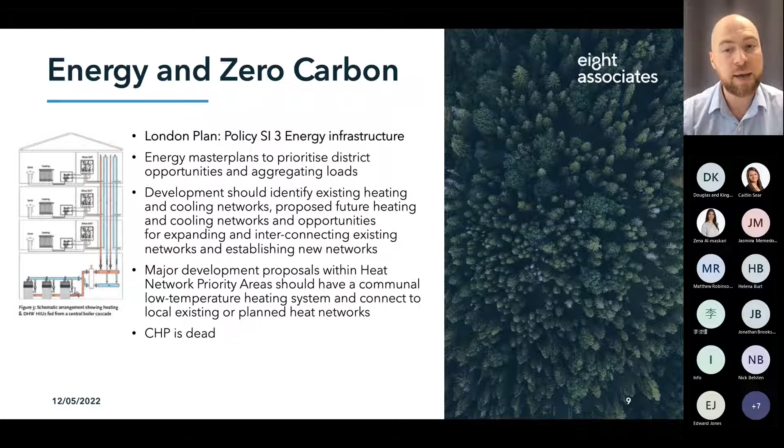So this is really our crib sheet for you. I would consider these if you're looking at making an application in Greater London, or for that matter, if you wanted a high performing energy and low carbon scheme - this would be your 9-point plan to check these points that we're hitting. This is really considered the minimal practice in London, and probably could be considered good or best practice elsewhere in the UK.

But you want to be looking through your energy assessment documents and everything related to energy and carbon to check that all of these aspects are ticked, because this will be what we're being judged against when the application goes in.

Next is overheating. So what is this? This is really, as we know, particularly in a lot of office buildings, we have a challenge with overheating in summer - too much solar gain through the windows, the inability of the ventilation system to get rid of heat, and that impacts on thermal comfort.

In the last few years, the requirements around this have got increasingly tightened up. We now have the new building regulations coming in June, which is Part O, and that's actually looking at the relationship between overheating and energy.

So this is only becoming tighter and tighter in terms of its requirements and expectations, and it's increasingly important with the impacts of climate change. In 10, 15, 20 years time, issues of overheating will only be exacerbated. So this is becoming subject to increasingly stringent rules, requirements and expectations from the planner's side.

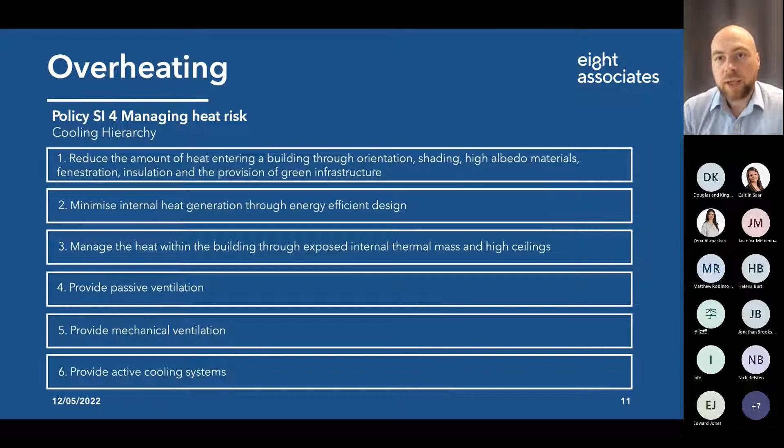The right of light technically isn't really a planning requirement, but from a risk and insurance perspective, we really need to undertake it at planning stage, because we need to understand implications for legal cases and the cost of compensation that might need to be covered later on. So this is really, really important.

And obviously, right of light, if we neglect this and don't understand the implications, it might mean we have to completely cut back and change the massing of the scheme later on, which can be hugely disruptive, massively costly to rectify, and can throw the whole scheme off balance and off plan. So this is one of those things which can be neglected but can have an enormous impact. We need to be mindful of this from a risk management perspective.

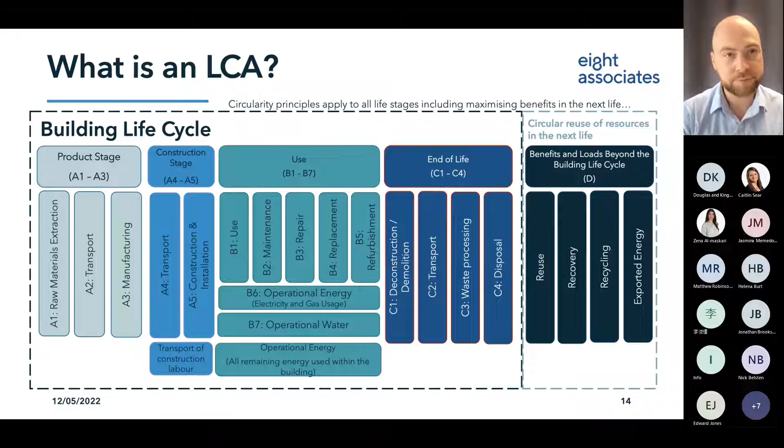So these are really the three ingredients or aspects you need to know about. We have life cycle assessment, which is the tool or method we use. The two reports we need to prepare are the whole life carbon report and the circular economy statement. These definitions are to describe what we're actually looking at, so when you're looking at these reports, this is what you should expect to see.

The key thing is we need to demonstrate how it's been calculated, and the process, the reasons why we've specified certain materials that might be considered high carbon, and if we're not reusing building materials that were on site as part of the circular economy strategy, we need to justify why.

So you might be wondering, why are we looking at embodied carbon as well? This is the second or third iteration of this policy document, and we have the London Plan guidance there. This is really the first regulatory policy instrument in relation to embodied carbon. There's also a bill, a lobby in Parliament to embed something like this in the building regulations - we'll see how that goes. But the London Plan is really leading the way on embodied carbon, and this is why.

Previously, say 7, 8, 9 years ago, we were modelling to what we called SAP 2012, and then we produced a new version called SAP 10. Basically what this all means is that as the electricity grid is decarbonising - coal's coming off, more renewables are going in - the carbon factor of electricity is getting lower and lower.

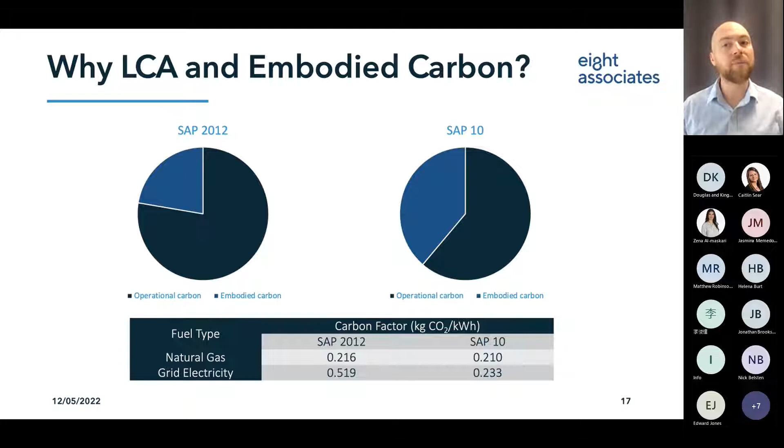You can see that when we were modelling, say, 8, 9 years ago, the embodied carbon - that's the carbon related to all the building materials in the assembly - might have been 20 to 25% of the total carbon pie. Now it's 40, 45, maybe even 50%, and that's just because the operational carbon emissions are going down due to the decarbonisation of the electrical grid. So it's putting more and more emphasis on embodied carbon.

A couple of things to be mindful of when we engage with this. If we do a pre-app and it's a major development, policy states we should complete the GLA Excel sheet, which details preliminary thoughts and ideas as to what we can do to reduce the embodied carbon of the scheme. Then when we go for the outline or detailed planning application, this is where we put in all the numbers and detailed calculations. So we don't need to do calculations at pre-app, but we do need to engage and show what we've done to reduce carbon in the scheme.

Crucially, this is what I mentioned before about sustainability requirements being conditioned for well after planning approval is given. We now need to produce a post-construction, or as-built, life cycle assessment study to confirm that what we said we would do at detailed planning submission - i.e. we will get this building down to 500 kilograms of carbon per metre squared - we need to demonstrate that we actually achieved that. So again, more scrutiny, more expectation, more detail.

Some of the key things you might want to consider in terms of general principles - again, looking at this from your planning or designer perspective, making sure: is this going to get through planning? Is it going to be scrutinised? We want to be looking for these principles, these narratives, these communications. We're talking about longevity, getting rid of waste, adaptability, flexibility, disassembly. All of those key principles need to be embedded throughout these documents. If we're not seeing these, we are not going to have a successful application in relation to whole life carbon.

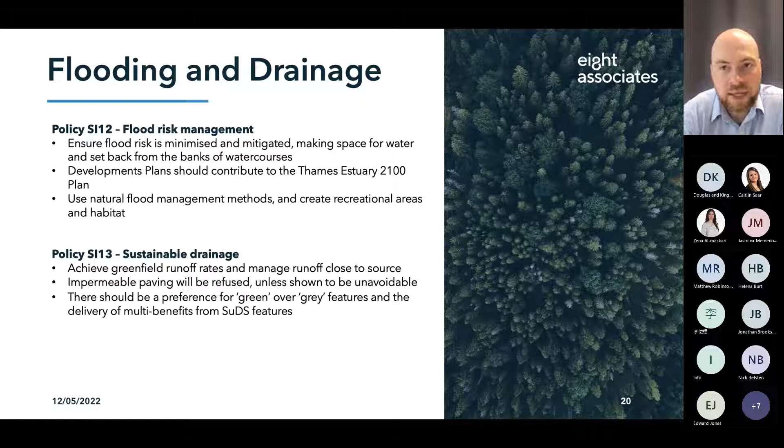As a key principle, we need to show how we're going through this hierarchy, this process. Again, it's not just about the outcome, it's about the process. We need to make crystal clear for the planners the process we've gone through and why we've arrived at the solution that we have. It's much like the energy hierarchy or the waste hierarchy or any of these other disciplines - it's really about reducing water use, or the use of the resource, and then finding the most appropriate means until we've basically got to get rid of it or discharge it.

One thing to look out for: if we're specifying any paving or ground covering that is not permeable, so will not let water permeate through into the ground, which means it has to be dealt with by the sewers, by the drainage infrastructure, that will be a very, very hard battle for you to have with the planners, because more or less it will be rejected. So wherever there's a flat surface, it needs to be permeable, and we need to be maximising the ability of rainwater to discharge or release into the ground.

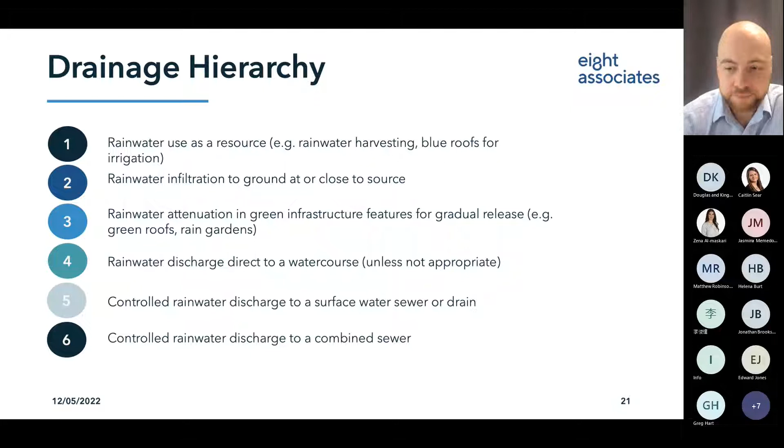So something to be very mindful of, and this is something we just see more and more questions being asked about, which tends to cause delays if we're not addressing it head on. Flooding and drainage features all feed into the wider bigger picture of green infrastructure, which leads into the natural environment, ecology, and biodiversity.

So these are the London Plan policies, and you can probably consider this to be a real gold standard in terms of the expectations, the breadth and the detail around green infrastructure and demands for it. Naturally, because of the urbanised context, there's a big expectation and demand to maximise green infrastructure as much as possible because it's sorely needed. Each of these policies obviously have their respective details.

A lot of it is focusing on connectivity, not looking just beyond the red line boundary of your site - how does your site integrate with other infrastructure around in the neighbouring locale, and connectivity? Again, we can't just have a site specific mentality, we've got to think of the bigger picture. That's something the planners are going to be expecting to see.

We need to make sure we're not having any loss in any kind of green infrastructure or ecology. Where losses are occurring, we need to bend over backwards to explain why and what mitigation measures have been implemented, and where we have a negative impact, just beware we're going to have a hell of a battle trying to justify it.

So this is one to really look out for, and we'll come on to this a little later from a risk perspective. Broadly speaking, the ecology and green infrastructure piece is one of the highest risk items, because if we get that wrong, or miss something at the survey stage - or rather the planning team and client team don't recognise or commission a survey early enough - it can have enormous knock-on effects. We've had delays of several months and costs in the tens of thousands for additional surveys and things. It's really one which has an enormous impact if it's not well managed.

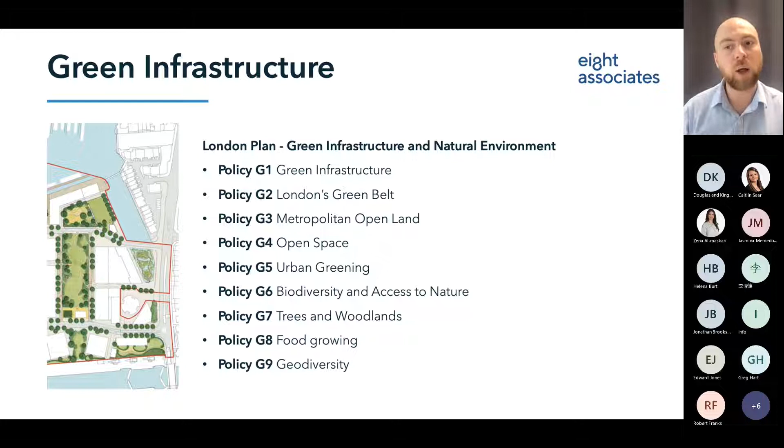So biodiversity is very of the moment, and it's a really hot topic. You'll be aware that the Environment Act has really strengthened that, and we have requirements around biodiversity net gain. So you all want to make yourselves familiar with that. It's a real key piece of policy and something we need to be looking at, and that all keys into the government's longer term plan to increase biodiversity up and down the country.

It's going to be mandatory from winter 23. So we're in this kind of implementation phase, this kind of slow phasing period. But from our experience, what we're seeing is local authorities are already asking for it anyway. They know it's coming, they want it, so they're already asking for it, even though it's not technically mandatory. So this is really something to be wary of.

And in terms of the biodiversity units, you need to calculate the biodiversity units on site. This can be quite expensive - it can be £20,000 per biodiversity unit, which we need to calculate, and you need to show that we're obviously adding biodiversity units. There are such things as biodiversity offsets, and for example, Oxford has the Trust for Oxfordshire's Environment that manages offsets.

So if you can't achieve net gain on site, you can pay into the trust, and then that will pay for biodiversity solutions elsewhere within the borough. But as we say, that's £20,000 per unit, so it's not cheap.

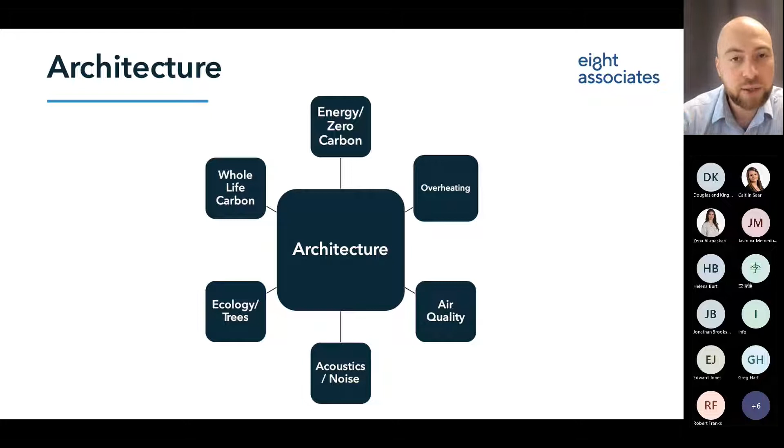MEP, similar, but probably fewer impacting sustainability themes. Naturally, the energy, obviously, from a specification perspective, overheating.

Usually, we should look at this as a two-step, tiered approach. We need to get the architecture right first for overheating, and then we go on to the building services. If we have a very inefficient and suboptimal building fabric design, we'll only be chasing our tail trying to battle overheating with the building services. So it starts with the architecture, and then we do as much as we can with the architecture, and then we graduate onto the best MEP strategy to reduce overheating.

Similarly with air quality, if we're in an area of poor air quality, we might be looking at filtration, restrictions on ventilation, such things, and that can obviously increase the cost and increase the complexity. And again, same story with noise.

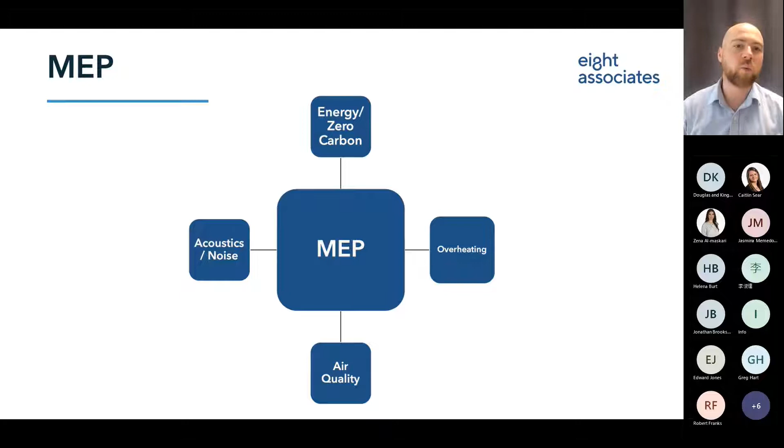And naturally, those sustainable drainage system features, whatever they might be, they all feed into the landscape design, and as does air quality, landscape more broadly, and the public realm. All of these site factors can feed into improving air quality.

And when we're perhaps in a borderline air quality management area, where the air quality is not awful but it's not great, we can use things like the landscape and site barriers to improve air quality. And that can be a way in which, if we can demonstrate we're making those changes and optimizations to improve air quality, we can save going down expensive filtration options, which is hugely beneficial.

So, trade-offs. As we've mentioned, the whole theme of this presentation really is about joining those dots, and many of these things have consequential dependencies, and we need to understand them so we can get through planning as quick and efficiently as possible, and to manage your risk.

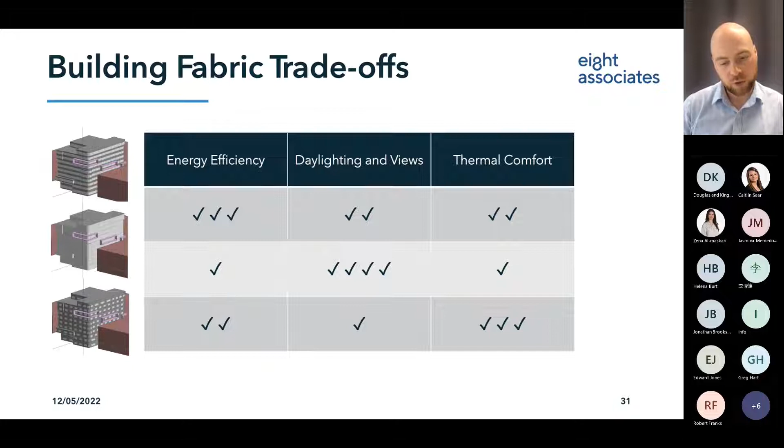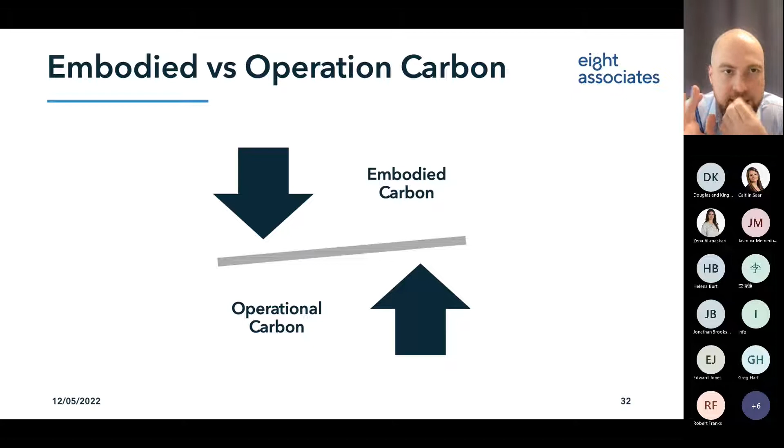The embodied and operational carbon relationship is quite an important one. As a rule of thumb, one of the reasons why we need to look at life cycle assessment, apart from it becoming a bigger piece of the overall carbon pie, is that there are fundamental relationships between the two. Until we were looking at embodied carbon a few years ago, often what we were doing was specifying building systems and building fabric specifications to reduce the operational carbon, to tick our magic 35% threshold for the London plan, for example.

Maybe to get BREEAM credits or whatever it might be, we'd be pursuing those, and to do that we'd be putting on more PV and maybe going to triple glazing and all these kinds of things. But what was happening is every time we made those decisions, we increased the embodied carbon, and the only way to actually check that we're making the big picture work is to calculate both of them. And many times we see inferior strategies being specified because they're not really looking at both sides of the coin.

So we need to make sure that we're addressing these, and I think it's something to look out for where we have a very aggressive strategy on perhaps the operational carbon, and we need to check that it's not bumping up the embodied carbon, because both will be scrutinised and they'll both have targets. So again, we need to make sure our design optimises both.

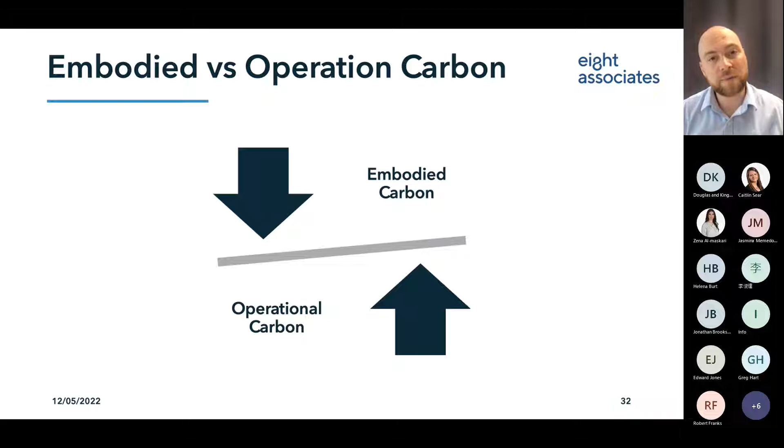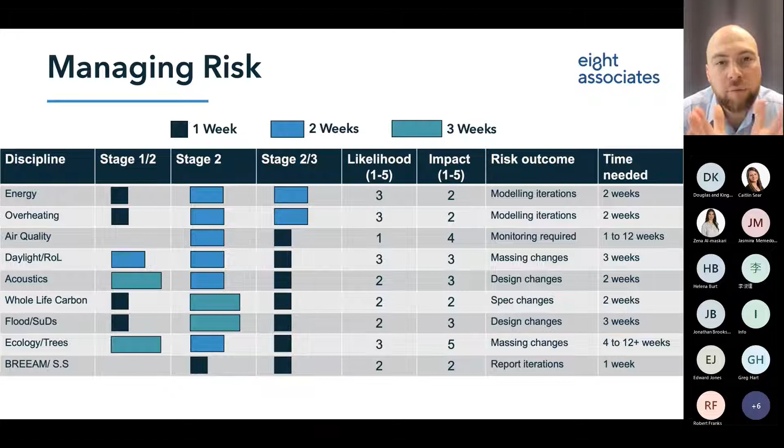In those middle two columns there, we have the likelihood of this risk occurring, and then the impact it will have. And obviously we're ranking it 1 to 5, but we just want to give you a bit of a feeling as to how we see the risk.

So energy and overheating, for example, at 3 out of 5, they're always going to cause a few problems, challenges. That's standard. We know that no design is ever perfect. First off, we've always got to optimize. We're gonna have to change the window sizes, whatever it might be. So we know that, that's fine. But generally we're used to it. It's quite standard. It's optimizing building fabric, a little bit of massing, perhaps floor to ceiling height. It's not the end of the world. So it's got a kind of 2 out of 5 impact.

That's fine. What is the risk outcome of a bit of oversight, or if we don't quite get it right? Well, we just got to go back to the drawing board and do another modelling iteration. And what does that generally mean if we've got to address a bit of a complication? It's not the end of the world. It's about 2 weeks, something like that, to go and look at it again, work out a better strategy, optimise, and then come back to the team.

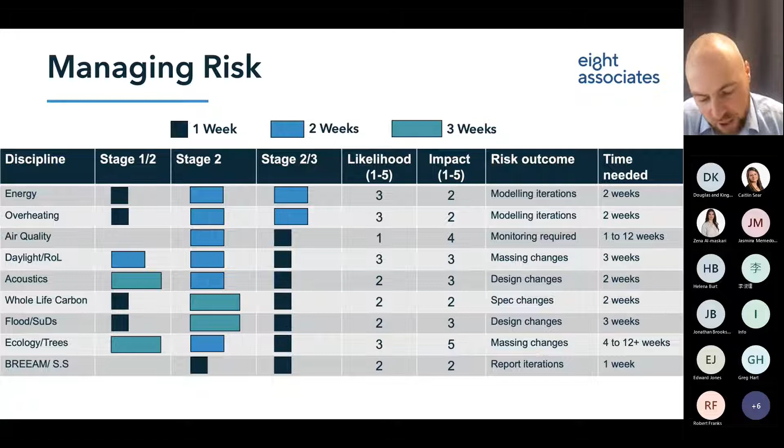Air quality - generally we only write an air quality report at stage 2, although we'll come on to that shortly. The likelihood of air quality impacting a scheme in any serious way is probably not that big, because to some extent 50% of the air quality issue is caused by transport, and there's not much you can do from a building perspective. However, obviously it has impacts on the design. The reason it's got a high impact is because if we get that wrong, or if there's insufficient data and it's been neglected, it can cause quite substantial delays.

So for example, we had a scheme just outside London towards Reading, where the local authority data wasn't enough and wasn't adequate, and they were very concerned, increasingly concerned about pollution in this particular area. So what they requested was that the project team go back and conduct diffusion tube monitoring - go and install tubes on site, record the data for 3 months, and then come back and update the modelling. So that delayed the planning by 12 weeks, which was obviously quite an impact.

Daylighting, again, a bit of a risk, particularly if you've got ROL, right of light issues, that can cause changes in massing. 3-week delay, not too bad. Acoustics, that can be reasonably impactful, not too bad.

But again, the key thing to point out is ecology. Now, this likely will have some impacts. We know it'll be additional studies, or if it's a tree of particular importance, we're going to have to build around it and work out how to protect it, etc. But the impact can be enormous. Of all of the impacts, ecology and trees can probably be one of the biggest ones to derail an application, as you probably may have experienced.

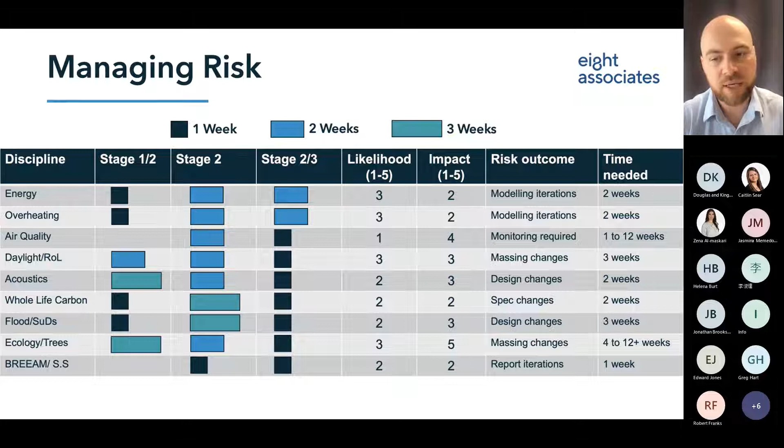So how does all this fit together? One of the key things to consider here is really the consequential impact. We can't really do an overheating study until we have information on air quality and acoustics, because if we can't open the windows for ventilation due to those two, then that's the overheating strategy out the window. We can't do a whole life carbon assessment, which quantifies all the materials going into the building, until we have a pretty detailed design and some costing information from the QS. So that has to happen later.

Again, all of these things are interlinked, and this is really just trying to get across to you how these disciplines relate to one another. I think it's often assumed that we can just conduct them all simultaneously, which is not really possible. And there's probably a note to mention here that if you fragment these services too much, there might be reasons why you need a specific consultant or company working on one discipline.

But if these are very, very fragmented, one team will complete their report, then send it off to another team. That team looks at it for two weeks and comes back and says no, that doesn't work for us. So we go into this big round robin situation where we're going back and forward, and all this does is just extend and elongate the planning process.